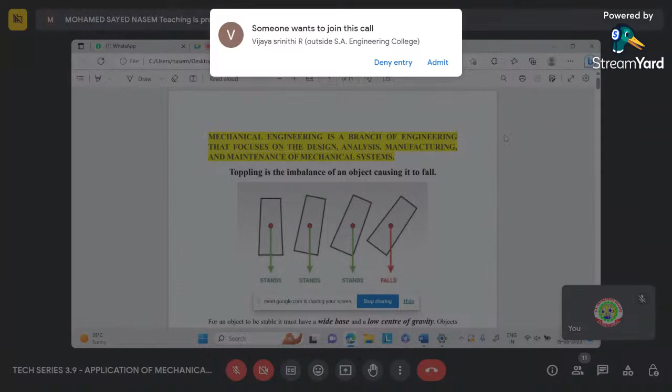Mechanical engineering is the branch of engineering which mainly deals with design, analysis, manufacturing, and maintenance also. Let me make it much simpler. If you want to make a steady table, the first criteria would be what size you need to make the table. What should be the height, the length, the width of the table? Okay, once that's clear, I'm going to make a table.

And then the analysis part comes. Now I'm making a table, so what material should I use? How can I reduce the cost? Mostly analysis deals with the strength of the product which we make and the cost of the product. Before making the product, you need to decide what material to use and how can I make it cheaper.

How could it be design friendly? How could it withstand much better load and get along with our design criteria such as the length, width, and height of the table? Then you start to manufacture. In manufacturing there are a lot of processes, and you need to choose a specific process which is cheaper and easy to make. There is no point in making a product which would cost you so much.

And the last thing that follows is maintenance. Once you release the product and it is running very good, everything wears and tears over time, so maintenance is quite important. This is broadly about engineering. I'm not going to talk heavily about engineering. My concept is about application of mechanical engineering in day-to-day life.

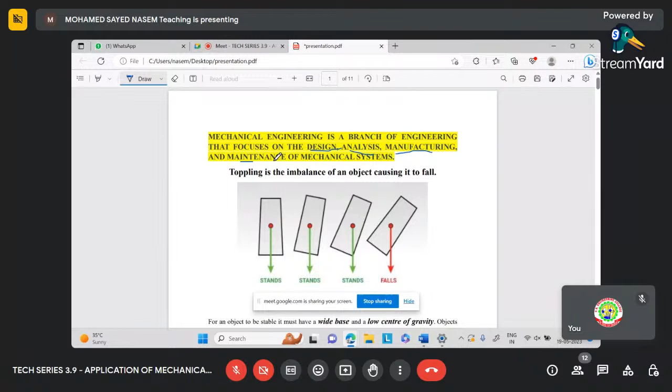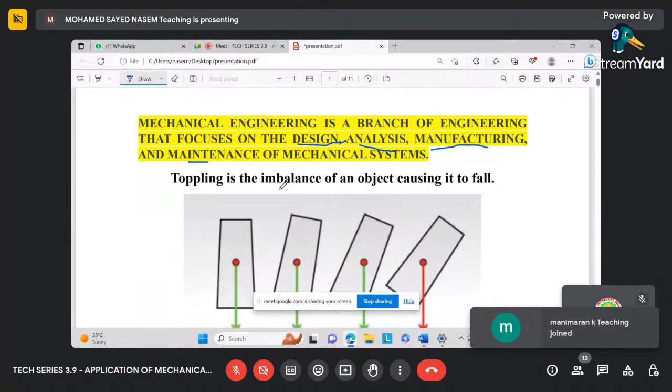So here we have something called toppling. What is toppling? Say you just push a glass of water. Will that water be toppled or not? Simple. In this diagram, consider this to be an inverted tumbler, and I have certain points. These points are called the center of gravity. Center of gravity is a point in an object where the whole mass tends to act.

In the first image, we can see where the center of gravity is located. If you want to find the center of gravity and my tumbler is a perfect rectangle in shape, I draw two diagonals, and my drawing is not that great. The intersection point will give you the center of gravity. The center of gravity changes due to the shape and the mass distribution of the item. So as of now, let's assume the center of gravity is at that point.

Okay, let's assume the center of gravity is at the point in red, and the property of center of gravity is that it directly points towards the Earth's center. So this center of gravity is directly pointing towards the Earth's center. If I apply some force at the top, what do you expect? The glass tumbler would tilt at this point.

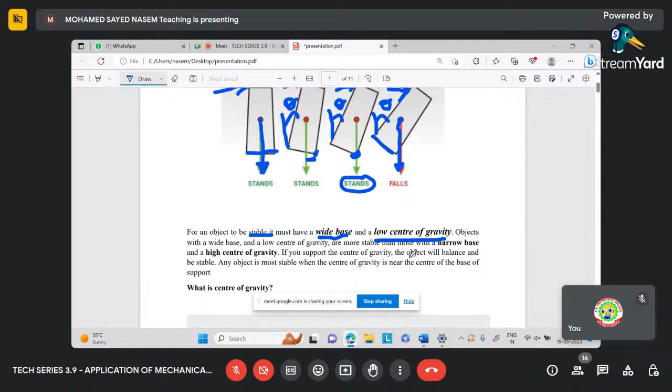So this will cause toppling. So for an object to topple, you have some conditions to satisfy. What are the conditions? For the object not to topple and be stable, there are some conditions: wide base and low center of gravity. So you can understand what wide base is.

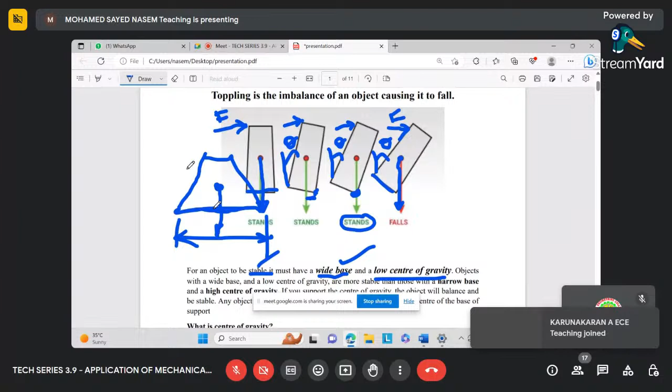If this leg was designed much bigger, for example, if this was like this, what happens? This is the base length. The base is much bigger. So this kind of design would be more stable. The center of gravity will be at some point here. It will be pointing down. In order to topple this, you need to push it to a huge angle. Only then will this object topple.

So the idea here is to understand when an object topples and when an object becomes more stable. In order to make a design stable, you need to have a wide base and low center of gravity. Okay, sir, how do you reduce the center of gravity from this point to a lower point? People might have a doubt. So I told you, to find out the center of gravity of a uniform object, you just draw two

diagonals. Consider this to be a cylindrical or a cuboidal object. So this is the center of gravity, and this will always point towards the Earth's center. Now my objective is to bring this point from here to the bottom. What I can do is redistribute the weight. What do you mean by redistribute the weight? The top portion, I could bring it to the bottom. So I just cut the top portion and place it here so that the mass doesn't change.

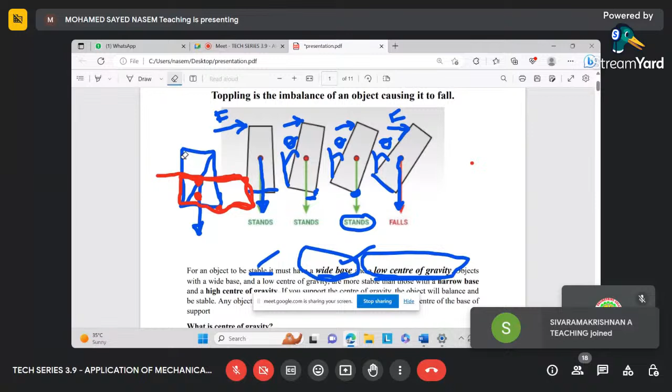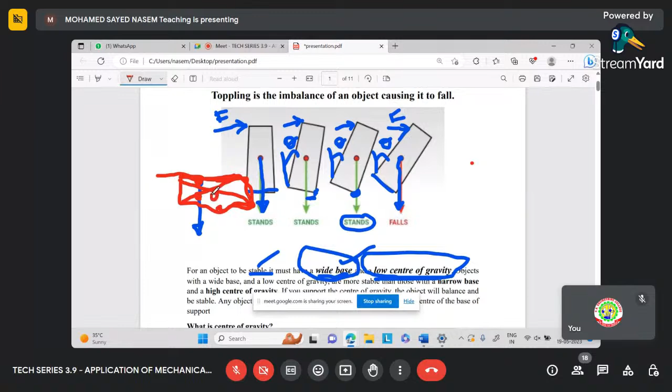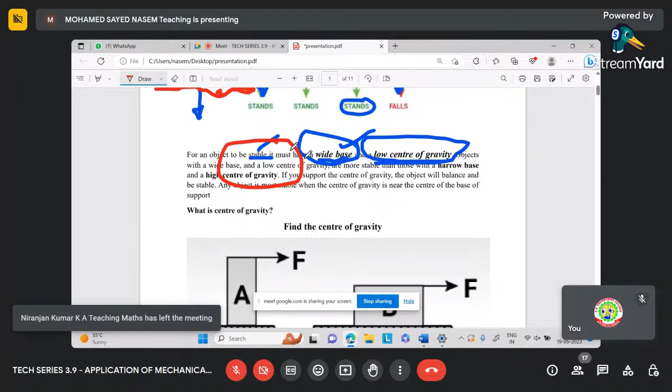Now the new object is red in color. I have just removed the top part, and now my object is here. The mass is same. But now the center of gravity will come more towards the base. So these two key points are very important. In order to maintain a stable design, you should widen the base and lower the center of gravity. That means you need to bring the weight to the bottom.

Okay, so we have learned what center of gravity is. So here I have a small quiz-like thing. You won't be able to answer, unfortunately, because I have the control. So I will help it out.

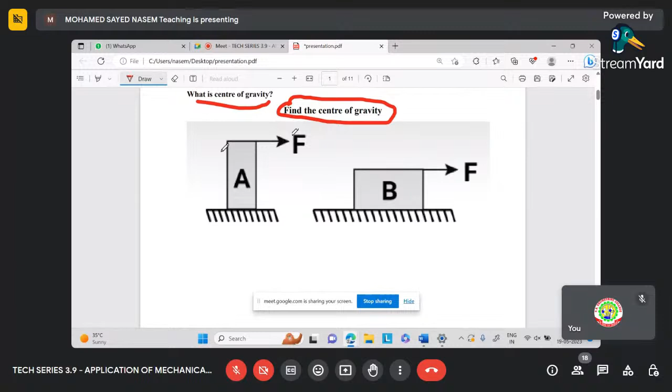So find the center of gravity. I have two objects, object A and object B, and my criteria is to find the center of gravity. This object is quite simple. Okay, it is a rectangle. It looks like a rectangle. This is also a rectangle, but the base of the rectangle is much wider.

Okay, in order to find the center of gravity, what you do is draw two diagonals. This is not the actual way of finding the center of gravity. You need to hang it at different points and allow the gravity to pull it down, that line to be intersected, but because the object is simple in shape, for our consideration let's make it simple. So here is our center of gravity point, right? So my center of gravity point is here, the intersection.

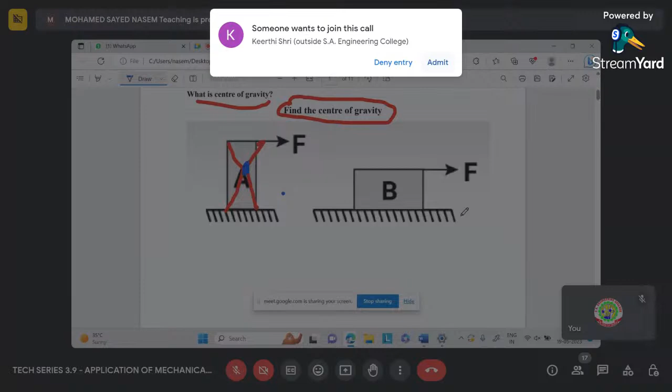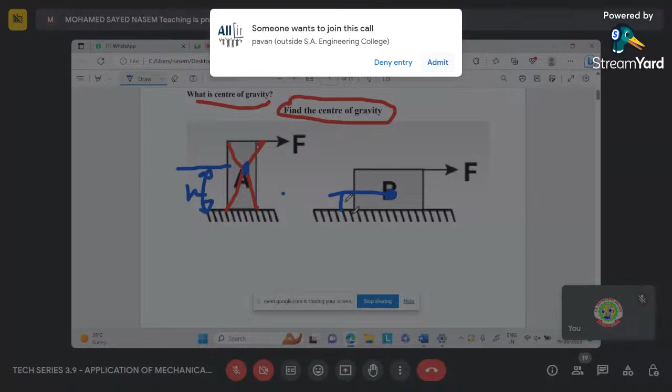So here, without drawing lines, I'm just marking a point. It is just an approximation. You would be able to figure out the center of gravity by the geometry of the object. So the center of gravity here is at a much higher distance than the center of gravity of object B. So the center of gravity of object B is lower from the ground, whereas the center of gravity of object A is higher from the ground.

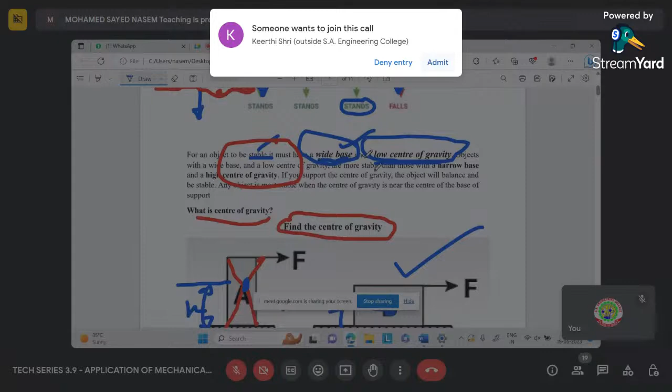So from this, you would be able to identify which is a more stable design. The stable design would be B. Why? Because of two reasons, two conditions. In order to have a stable design, your base should be wide and the center of gravity lower, right? Compare the base of A and compare the base of B. The base of B is wider when compared to A.

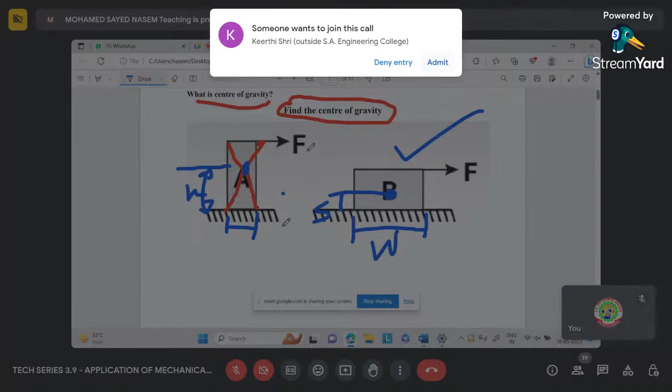And the height of the center of gravity of B is much smaller than A. So if you try to apply a force F on both objects and try to topple it, A will be easily toppled. B will also be toppled when the center of gravity line passes the base.

For example, let me draw, this is B. So if I tilt it a smaller distance, the center of gravity is here, and the center of gravity lies within the base. If I tilt it more, what happens? The center of gravity has gone beyond the base. This was the base, right? So this leads to an unbalanced condition.

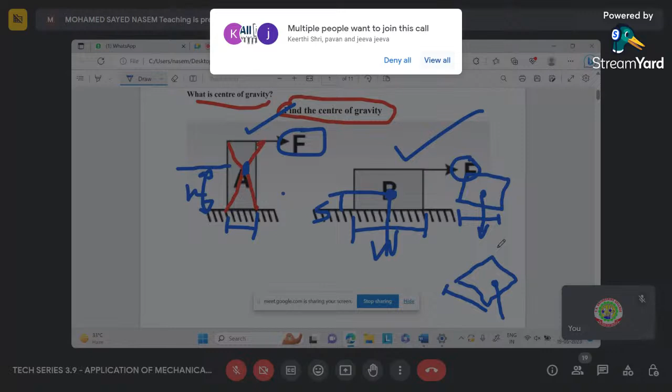So again, these are the two key points in order to see an object and predict whether you have a stable design or an unstable design. What should be the criteria? You should have a wide base and lower the center of gravity by some means.

Okay, so now let's take it to a practical example. Here I have a car. It looks like a decent sedan car. Okay, so I have three examples of the car. Now let me consider the first example, these three cars. What is happening is the car is going on an inclined plane. Okay, the road is slightly tilted. So what happens? The car will also get tilted.

So now let's check whether the car is safe to drive and how to choose a car. So consider that you're going with your parents to choose a new car. So what are the criteria? We always look at the color, the interior, the features, the specifications. But the most important thing is safety. We also look at safety in terms of whether airbags are available, the seatbelt locking systems.

But consider that we are driving on a slant or a slope. These things have to be considered: what kind of car you need to buy. Okay, so let's consider this condition. So in this car, the center of gravity is located at the center approximately. So this base, the tires, right? Both the tires are the base.

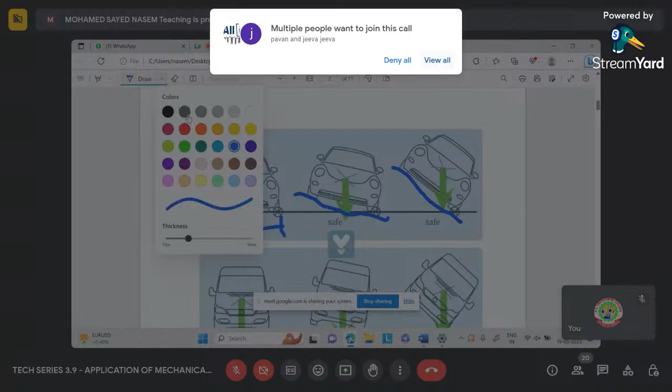So center of gravity, let me change the color. The center of gravity is within the base. So the car will not topple. Topple is just going around this way. Okay, now the car is going on an inclined plane. The center of gravity always points straight towards the ground, the earth's center. Okay, still my center of gravity line is within the base of my tires. So this is also safe.

When it is inclined more, what is happening? You can see, right? The inclination gets more and more. So when the inclination gets much more, what happens? Still, my base is here. These two points are my base points. So this center of gravity line is within the base. So still, this car is safe. This car is safe to drive.

So let's consider a different car. What has happened to this car is, this car is shorter. The height of the car is low. Let me represent this height as H1.

And let me represent this car, which has a height H2. Now we could compare the height of H1 and H2, and obviously H2 is bigger, right? So consider a car like Innova, which is much taller. Nowadays, big cars are more preferred, and we tend to buy big cars, not understanding the risk of buying those kind of cars, right? So what happened from here to here?

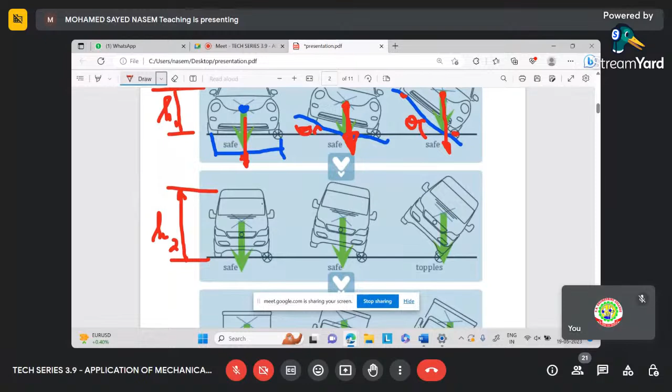The center of gravity point was here at a height. Now the center of gravity point has moved up. Okay, from here to here, the center of gravity moved up. I told you, in order to have a stable design, your base should be broader and the center of gravity point should be much lower. So if you have that condition criteria, you would be able to have a stable design.

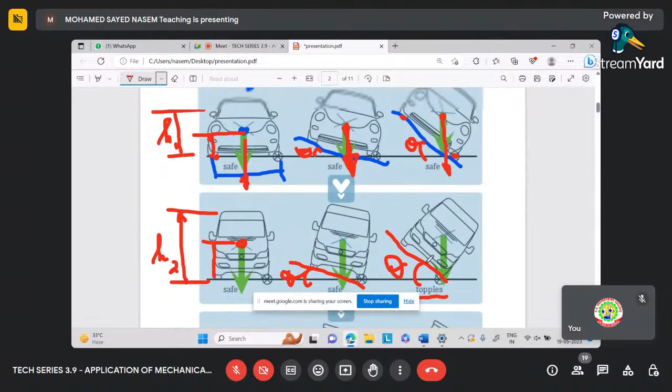So now there is an inclination here. There is also same inclination. These thetas are same. Both inclination angles are same. So here, but what happens? The car tends to topple. I'm not considering what speed you are driving a car on that plane. It is just purely based upon the design and stability, whether the car would be stable or not.

Why does this topple? The center of gravity point is here, and the center of gravity line, when you extend it towards the earth center, what happens? It is away from the base. When this happens, it is going to topple. Okay, so let's consider bigger vehicles.

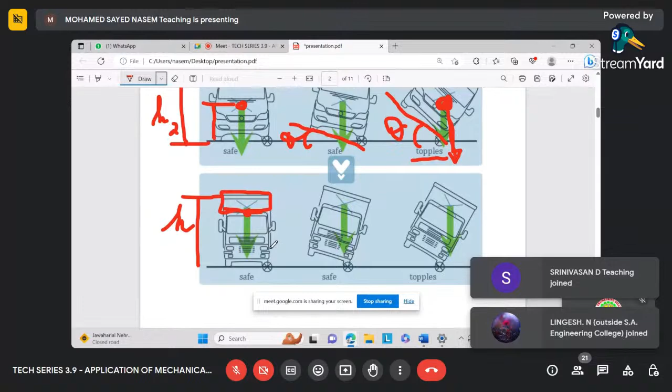Let's consider a lorry. Generally the height of a lorry is more, and because it has a higher height, people tend to load weight at the top portion. In the lorry's bottom portion, you have the chassis, but if the lorry is loaded at the top, what is going to happen? The center of gravity is going to move up. If I load my lorry at the bottom, the center of gravity will come down. People tend to make these mistakes.

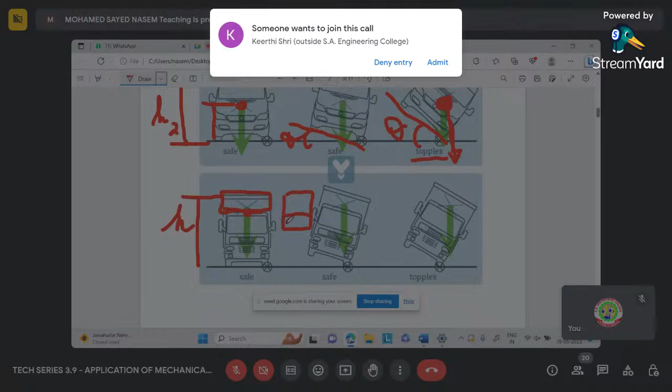Lorry drivers, if they have a space to fill, let's see, this is a container of the lorry, space to be filled. If they keep lighter weight at the bottom and heavier weight at the top, the center of gravity moves up. So they could make a small change in loading their trucks. They could keep the heavier portion down and lighter portion up in order to bring the center of gravity to a much lower position, right?

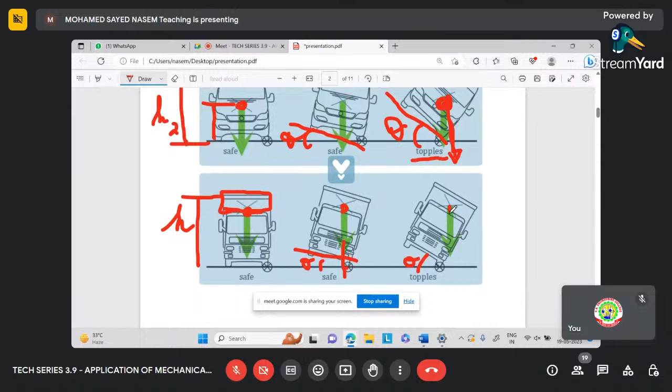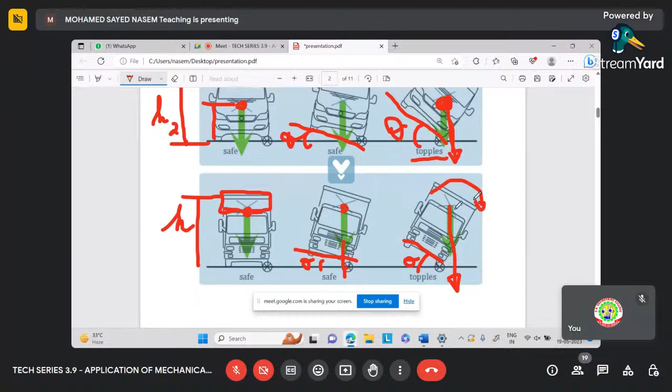So now let's consider this lorry. The center of gravity is at the top. So for a smaller angle itself, what is happening? Almost the center of gravity line is touching the base. And when it is more tilted, the center of gravity line is away from the base. It is not stable. So this lorry would topple for sure. So from this, you could find a pattern, right?

So if you ask me which type of car is better to buy: a car which has a center of gravity much lower to the ground. Consider race cars, Formula One cars. Do you know that people sit almost at floor level? So they reduce the height of the car. Let me consider this Formula One car. I'm not good in design drawing. So the Formula One car's center would be much lower, so that it becomes much more difficult to topple.

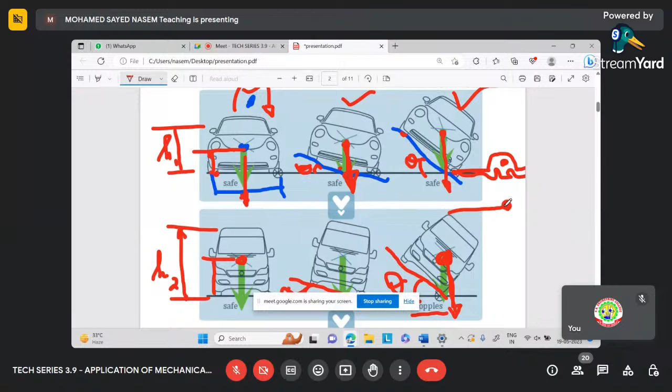And the width of the car would be also big, right? So let me consider these are the tires of the Formula One car, and the driver would be sitting almost close, right? So you have a wider base, and the center of gravity point is very low. So this car can be tilted to a very, very great angle, and still it will not topple because the center of gravity line is within the base.

So next time when you go to shop for cars with your parents, you need to look for two factors. Check whether the width of the car is a considerably good distance, because nowadays we look for compact cars and city cars. But having a compact, smaller width could be dangerous. You want to have a good wider width. More the width, the better it is.

And you want the car to be short. Some people think that if the car is tall enough, we have good sufficient legroom. That is true, but if we consider toppling, that is not good.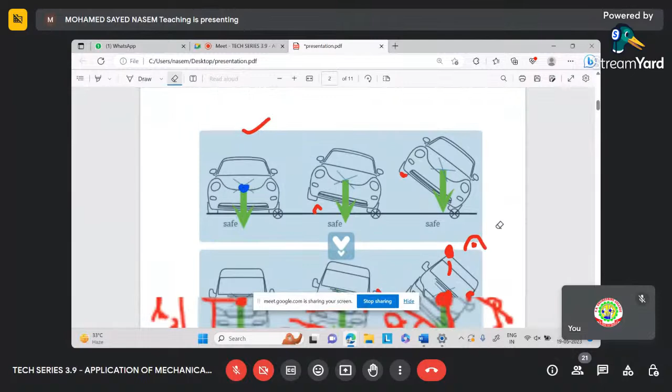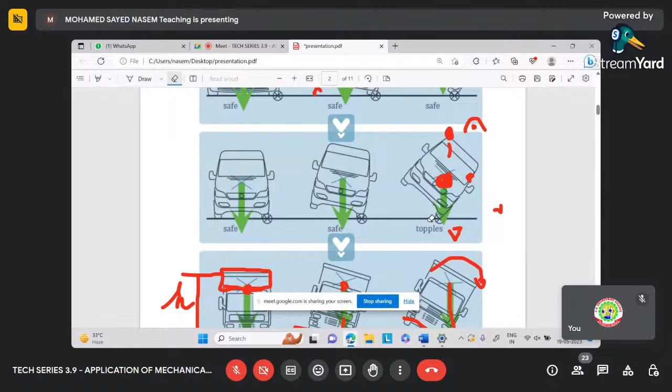Okay, so next time when you go to buy a car or make a decision, because it is a huge purchase and life comes into play when buying a car, and safety comes in, while driving also you need to really understand at what inclination you can drive the car. Some people think that their car can be tilted to a much greater angle, and they drive it on a slope, and that would cause them to topple, right?

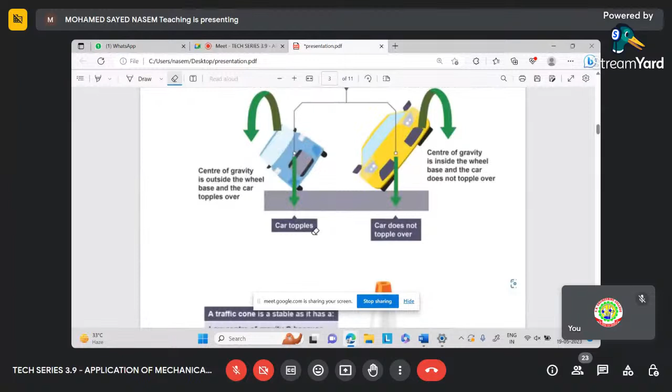So this is a comparison between two cars. This is a narrow car, a small car. Okay, this is a broader car. These are being inclined to the same angle, theta. Okay, the inclination is the same. But what is the difference here?

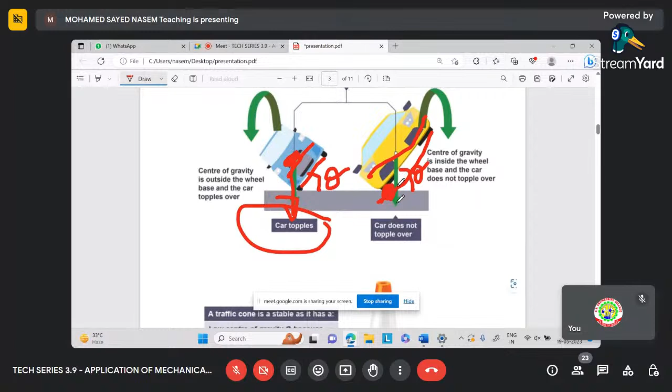The center of gravity point is here, and the center of gravity line has gone out of the base. So it is not stable, and this tends to topple. The car will topple. Here, because of the wider base, we still have some room here, right? The center of gravity line has not crossed the base. So this car is more stable and does not topple.

And this is also another example. Look into the design factor, right? Why should it be designed like this? This is designed in this way because more mass is concentrated at the bottom and less mass at the top. So technically the center of gravity point comes at the bottom, and I told you, wider base.

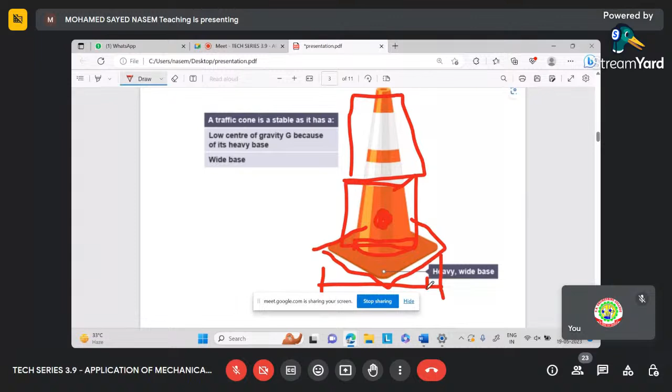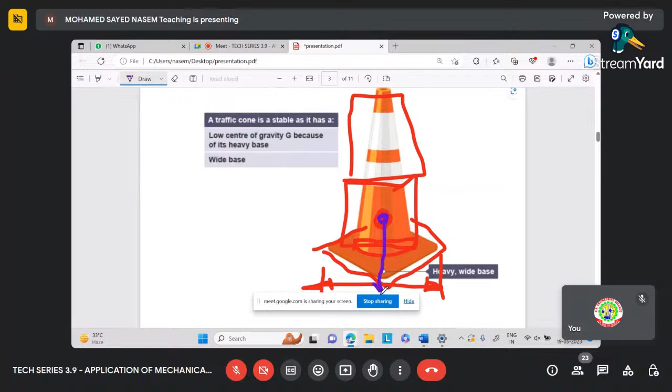So look, they could have completed it with a cone, but the reason they have this rectangular or square base is they wanted to increase the width. They could have a circular base, but they prefer this design in order to increase the width by a large margin, so that the center of gravity line is within the base, and the center of gravity point is also close to the ground. This is where the center of gravity is, close to the ground.

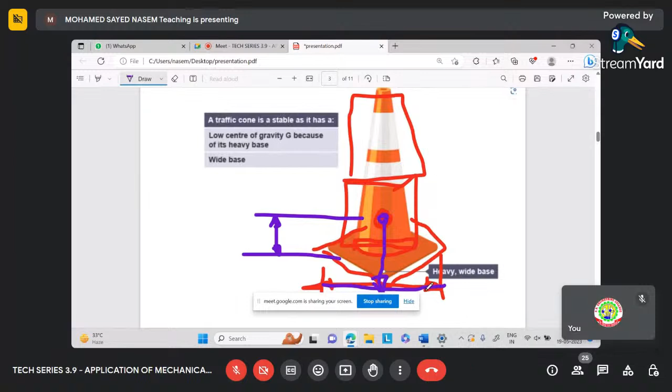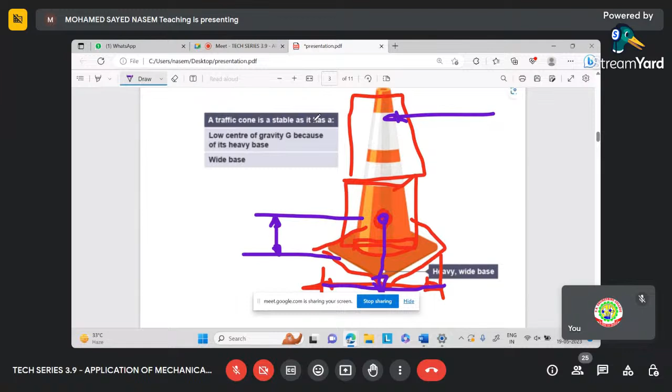So I think you would appreciate why we have a design like this, so that if someone accidentally knocks this cone with their hand, it won't topple. It will incline and come back to its original position because of its stability.

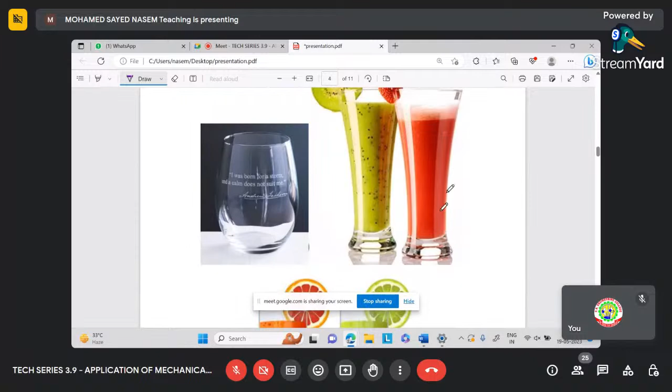Okay, so now having understood all those concepts, let's consider another scenario. Now you are planning to have a fruit juice shop, and you want to purchase some tumblers. By looking into the design, what kind of tumblers would you purchase? Number one, you would purchase fancy tumblers, obviously, for attracting customers, and you will try to buy tumblers which hold less fruit juice but appear as if the quantity is more.

That's another criterion. But consider the safety of the tumbler: because you will be making juices and often using these tumblers, you could accidentally topple one by applying a force, right? This happens at our house also. We have a jug of water, some family member accidentally knocks it, and the jug tends to topple. So we need to consider what kind of glass to buy. Consider these two scenarios.

In order to have a stable design, your base should be wider, and the center of gravity should be low. Base should be wider and the center of gravity should be low. So consider this design. Let me change the color because it is blue. Let me make it yellow.

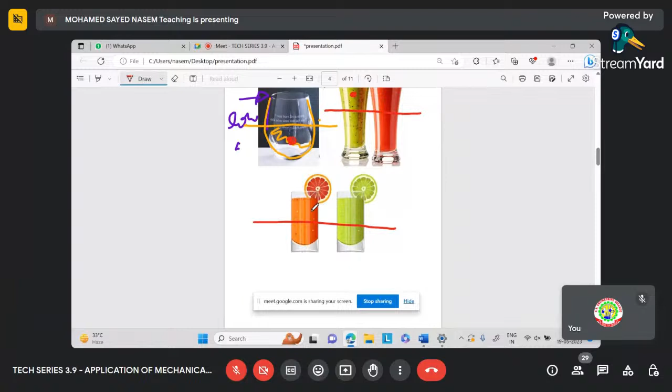Now let's see here. Again, draw a line bisecting the glasses. Here the center of gravity point is just at the center. That's number one, right? Number two, let's consider the base. This is the width of the base.

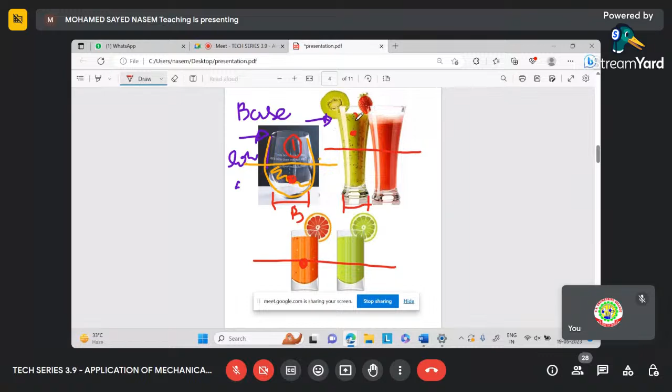This is my base, right? Here, how is it designed? The base is much narrower when compared to the first glass, right? The base is first narrower. Let me have this as first glass condition, second glass design, third glass design. Okay, in the second glass design, I have a narrow base. For a third glass design, I have a broad base.

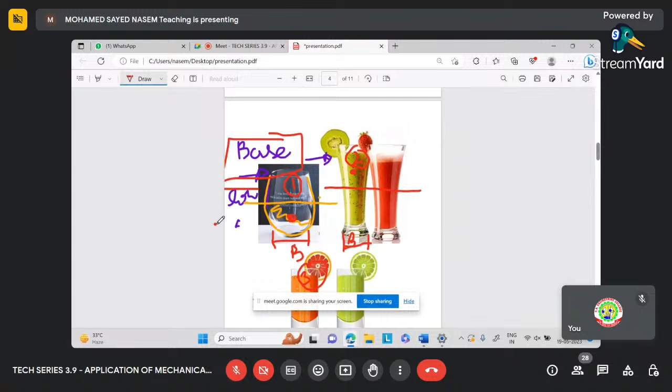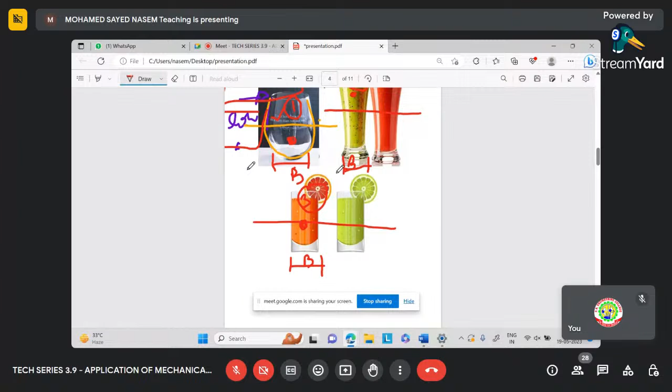So now you can compare all the three glasses. I told you for a stable design, you should have a bigger base and lower center of gravity. Let's compare 1 and 2. It's been messy, now I'm going to erase it a little bit. So let's compare 1 and 2 here. Which has a bigger base, 1 or 2? Obviously 1 has a bigger base. Which has a lower center of gravity, 1 or 2? Obviously 1, whose center of gravity is at a much lower distance from the ground.

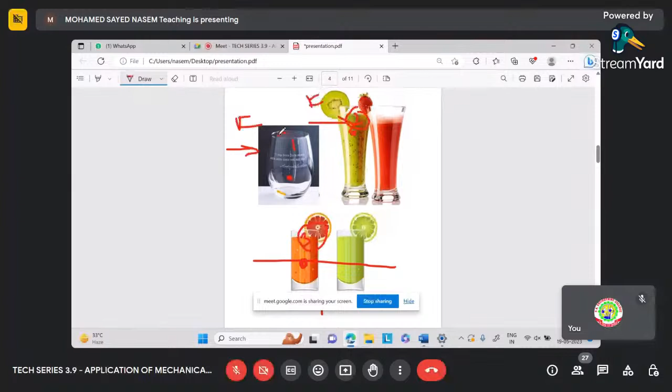Okay, so comparing these two glasses, glass 2 might look fancier, and you might have this kind of glass in a shop. But if you're buying it for a house, you would definitely buy glass 1, because accidentally, if you apply a force, let me erase, a lot of things going on. Accidentally, if you tend to apply force, what happens? Accidentally, I apply a force. Glass 1 tends to be more stable. It won't topple and it won't break. Whereas glass 2 will break for sure.

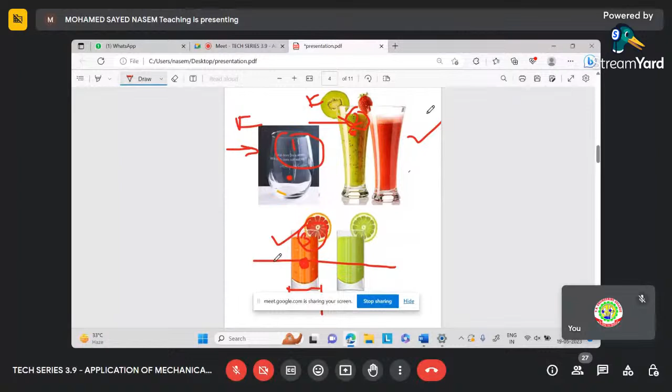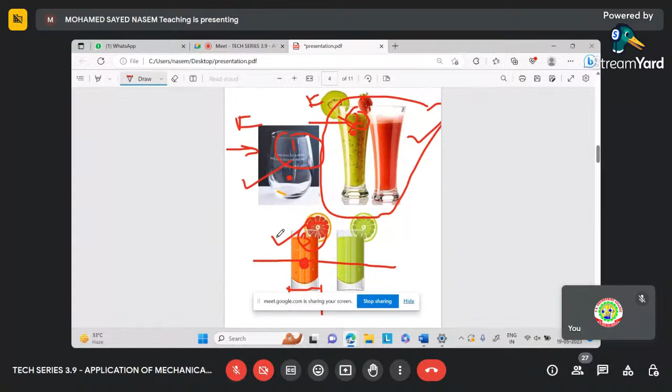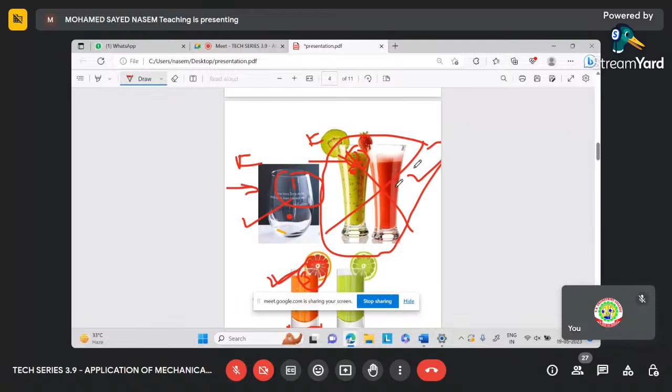How about glass 3? When comparing glass 2 and glass 3, glass 3 has a much wider base and the center is at the center. Okay, so glass 3 is also a better design when compared to glass 2, but unfortunately in most of the juice shops they prefer glass 2, which is prone to breaking, but it is good from an aesthetic point of view because it consumes less juice and it looks good and nice. But if you decide to buy it for your house, go with glass 1, or you can go with the tumbler, glass 3, which is a much better design. I would never prefer this design because it is prone to breakage due to tumbling.

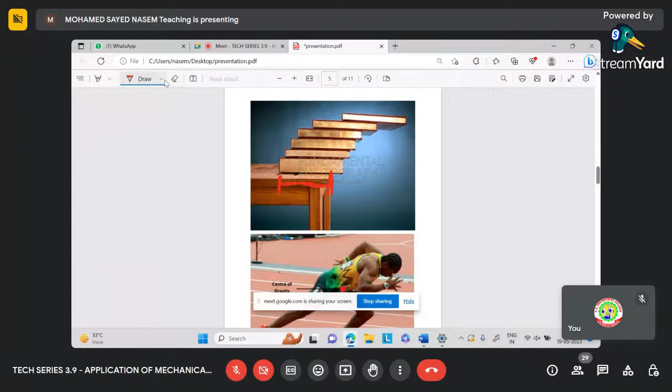Now consider, where is my base support? From here to here, there is no support after the edge of the table, so the base support is here and here. And if this condition is stable, what should the center of gravity line be passing through? It should be passing through this line, passing through the base, anywhere in the base. Our common sense says that because the weight is here, the center of gravity, the center of mass, should be somewhere here. And I'm not bothered because this is a stable design.

So you can also trick your friends by making this setup. How do you make this setup? I told you, to be stable, the center of mass should be at a lower position and the base should be wide. So in order to make this kind of arrangement, I'll change my color. I would use a bigger, longer and heavier book at the bottom. The next book should be heavier, but with a little bit of offset from the first book, hanging a little bit, and the next book which you keep above should be lighter, a little bit offset.

So what I'm trying to do is make my center of gravity point lie within the base. That is the concept. If you are able to achieve it, you would be able to get this design of arch. So next time when you see an arch in building design or anywhere, always think about why it is stable, what could be the conditions to make it stable, and how you could improve the design, right?

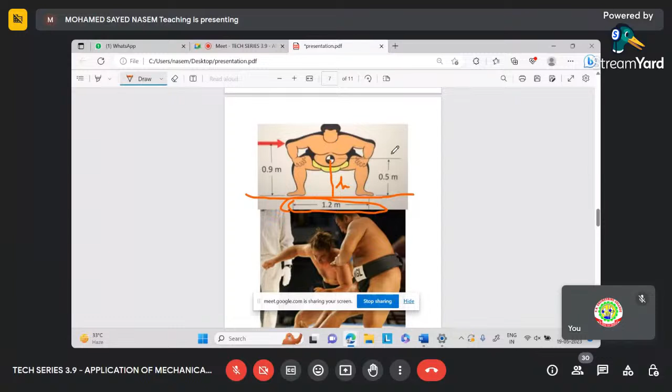If this person had been standing, sorry for my bad drawing, I guess you understand what I'm trying to say. If he was standing, the center of gravity point would be at a much higher position, right? So I told you, in order to be stable, the center of gravity has to be lower and the base should be wider. That is why sumo wrestlers keep their feet wide and crouch down.

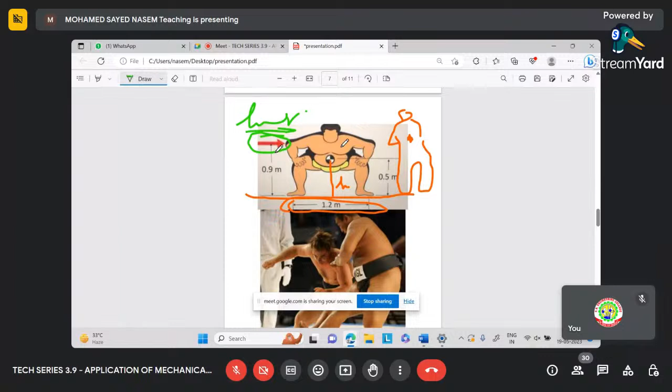So now, if we consider force also, if we apply a force in this direction, the red arrow, he is much more stable because he needs to be tilted by a large angle. You have to apply a huge force in order to topple him. But if his legs were much narrower, if his feet were somewhere here in this green box, it is easy to topple, right? You get this idea. So you can figure out what makes a design much more stable.

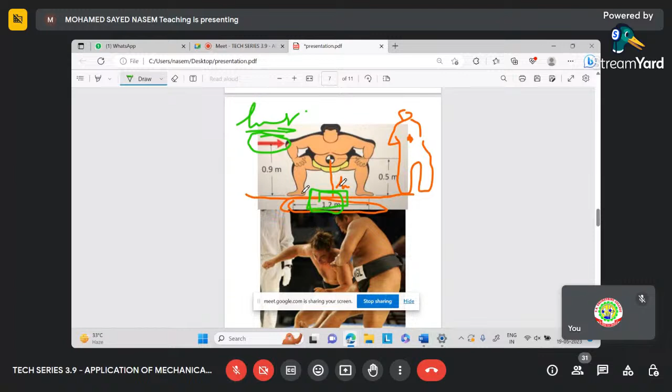Next, here there are two sumo wrestlers trying to compete. The whole point of sumo wrestling is to topple the other person. We have this wrestler, let me name this wrestler 1 and this wrestler 2. By looking at this screenshot, now you should be able to predict which wrestler will fall down. Okay, so let me help you find it by looking at it.

Let's see. For both wrestlers, one foot is up. So this wrestler's base is here. And this wrestler's base is here. And you see, wrestler 2 has not bent so much, whereas wrestler 1 has bent a lot.

Okay, so his center of gravity has moved somewhere here. This person has not bent. This center of gravity would be here. This would be at a lower position because he is crouching. The person 1 is crouching, so his center of gravity would be lower. The person 2 is standing. His center of gravity would be at a higher point. So I told you, for a stable design, lower the center of gravity is good.

If you consider that, this person is good. This person is not that good. But the wrestler 2, he has not bent that much and his feet is well stable. So if I draw a line, it is well within his base, right? This is his feet base. Whereas his feet is here, but the center of gravity point is away. So the center of gravity point is away and the feet is somewhere else.

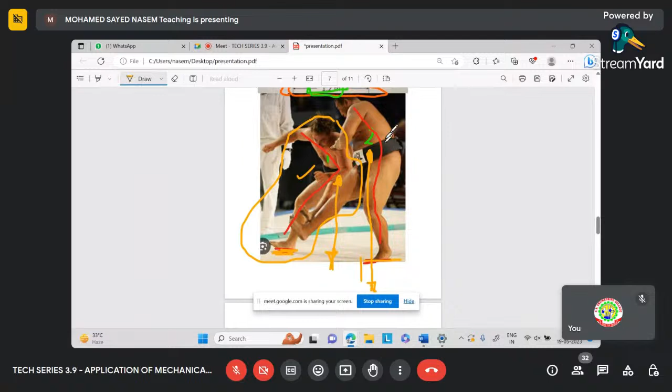Okay. Now this is the third scenario. So what is happening? Look at this wrestler. Wider base, and he's crouching. So his center of gravity is somewhere here. Let's draw a center of gravity line which points toward the Earth's center. So this center of gravity line is much within the base.

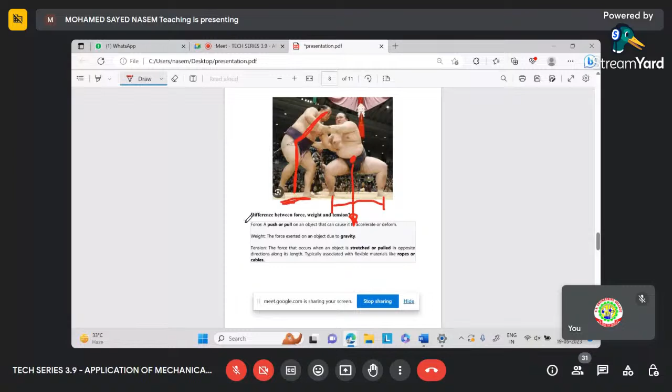Whereas what has happened, look, I'm drawing a stick diagram. He is bent, right? He is bent and his feet is here. So what is going to happen is his center of gravity, his center of mass, would be somewhere here. If I draw a line, it is away from his feet. So the sumo wrestler, who is very stable, would be easily able to topple the other wrestler.

Okay, this is not only in sumo wrestling. This happens in almost all kinds of sports. Even in cricket, now there is an IPL season going on. You could see catches being taken, and some of the catches are terrifically taken. They are able to take those catches if they are very stable. Even when they make a dive or attempt to catch in a diving position, they need to be stable.

And you can also find some silly catches which come directly to their hands being dropped, because they would have kept their feet in the wrong position. The body, they would have bent to one side, which would cause them to topple. Okay, so as of now, we have learned what makes a design stable. What are the criteria to make a design stable? Two criteria: wider base, lower center of mass. And the center of gravity line should always pass within the base.

This is that concept. Now let's move to a different concept. As we are in the mechanical series, let's discuss the difference between force, weight, and... let me erase a little bit. Okay, let's find what's the difference. Let me change my pen. I have an issue. Okay, I'm in my pen mode. I'll just check eraser, pen.

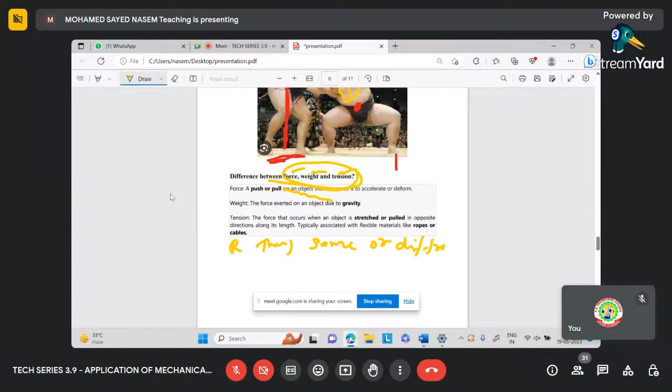Okay, so let me give you an example. My name is Nasem. My family members and close friends call me Nasem. My colleagues call me sir. My wife calls me Bubbly. It's all different names. My wife calls me Bubbly, my colleagues call me sir, my close friends and family relatives call me Nasem.

I'm asking you: Nasem, sir, and Bubbly, do they represent different persons or do they represent me? This is me. Okay, I'm happy. I'm not yellow in color. I'm happy. These all 3 names are the same, right? You could call this in different ways. Let me erase. Same way, these three terms are same.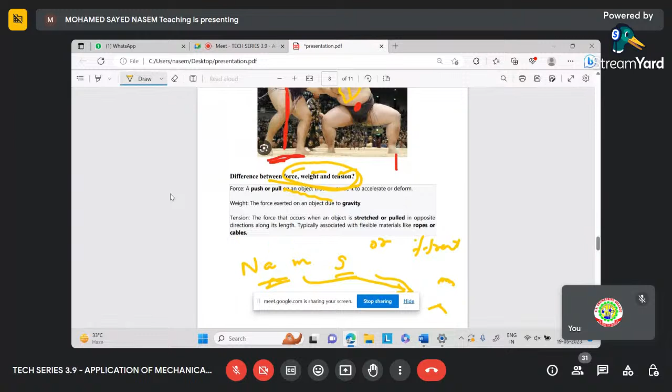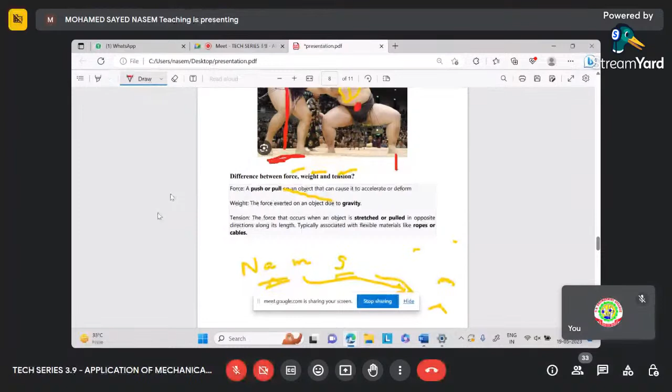Okay, what are the three terms? Let me change the color. These three terms: force, weight, and tension. These three terms might have different names, but they mean the same. Because you know that the unit of all three terms, you would have studied in 12th, is newtons. All three are the same. So what is the basic difference between these three names?

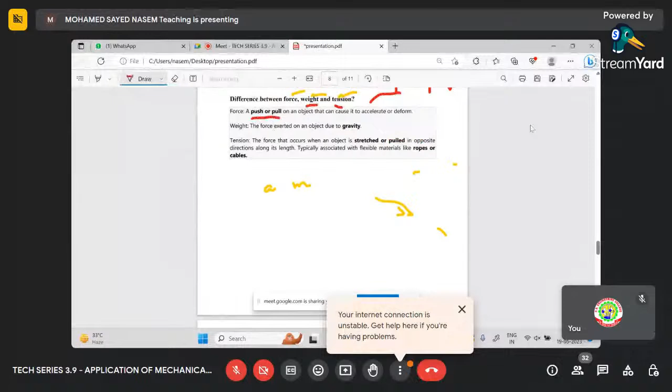Okay, a push or a pull is called a force. Here I have written, right? So let me erase, so shabby. So a push or a pull is called a force. Weight is also a force that is caused due to gravity. Okay, so let me consider a box. If I am pushing, I will call it a force. I am pushing or pulling.

Push or pull. Okay, I am pushing or pulling. This is called a force. This is a force. So next, let me consider. This object is always attracted, pulled by whom? There is an imaginary person who's pulling this object straight towards the ground. Who is that person? That person is gravity. So force due to gravity is called weight.

Okay, push or a pull is called a force. And if that force occurs due to gravity, who's pulling? This is me who's pushing and pulling. If the gravity pulls, it is called what? It is called weight.

And what is tension? Tension is also the same thing. You have a pole, you attach a string to that pole, and if you're tending to pull it with a force, what happens? There is a tension created in the string or the rope. So the force in the rope is called tension, right?

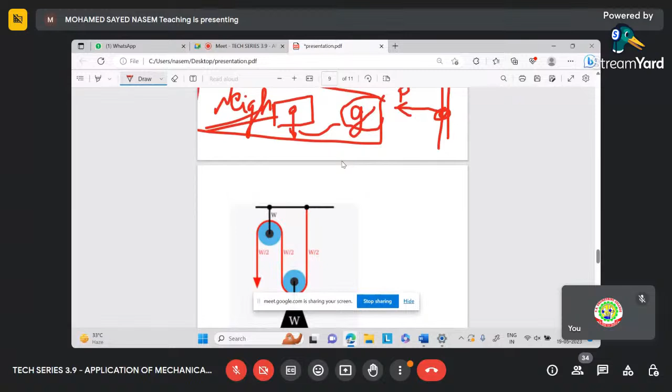So now we understand force, weight, and tension. All three are the same. Force, we name it when an external body is being pushed or pulled. Weight is a force due to gravity, and tension is a force in strings. You need to understand that. Okay, now let's practically use this concept in order to lift the weight. I just want to explain it very short and simple.

So here my objective is to lift a weight. I have a weight, mass W. If I'm lifting it, I have to bend. This is my head. With my hands, I have to lift it, right? So much stress goes on my spine. I might injure myself. So here I have to pull it up.

But with a pulley system, I have a pulley and I have a string attached over the pulley. On one end, the weight is connected. Here, I can pull it easily. Here I have to pull it up, which will put so much stress on my back. Here I can use my weight in order to pull it down so it does not hurt my back. By just using a pulley, my work has been simplified.

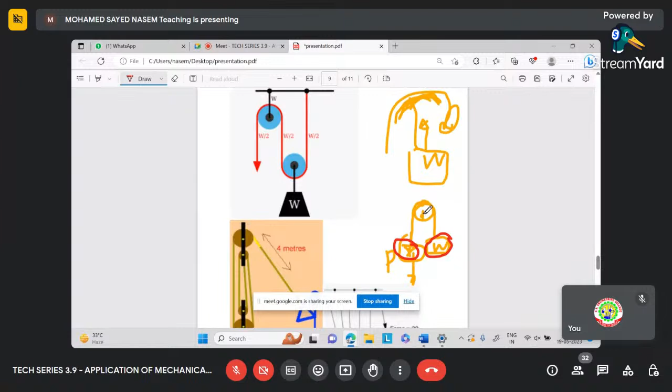So here is a pulley system. More than one pulley, you call it a system, right? So why use a pulley system? You use a pulley system in order to lift it much easier. Let me change the color. Whatever the weight here, I have to put the same amount of effort on the other end if I use a single pulley. But the advantage of this single pulley is I'm changing the direction of force.

But here I have a pulley system. There is the same amount of force because this is a single rope. The same amount of force is always present in this rope. So if I cut this rope here, there is a tension. I told you there is always a tension. Force in strings is called tension. So it is as if two persons are pulling. The same tension is here. The same tension is at the other end also.

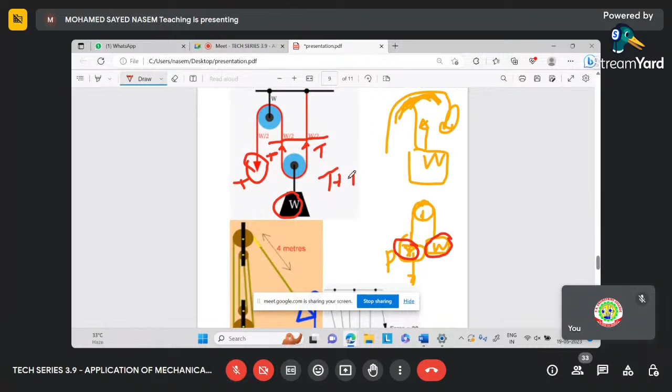I'm pulling at this end. If I cut it, you can see that this has to be pulled. In order for this to be lifted, the same amount of weight should be balanced. So there is a tension T here and a tension T here. A little bit of mathematics: how can I write an equation? Tension plus tension will be equal to the weight I'm pulling. So 2T = W. So what is the tension in my string? It is W/2.

Let's do the math. If I need to pull a weight of 100 kg, what force should I apply here? The force I have applied is just the tension. How much is the tension here? If W was 100, W/2 would be 50. So now there is an advantage. In order to lift a weight of 100 kg, it is enough for me to apply a pulling force of 50 kg. So this makes an advantage.

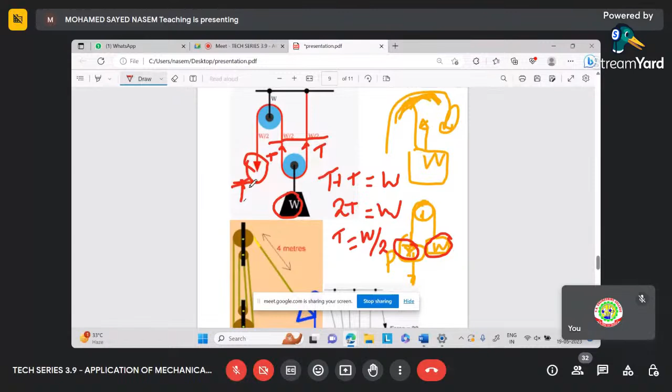Here, let's see what is happening. Will a person be able to lift a 200 kg load? No, right? With the help of pulleys, this could be achieved. So I'm making a construction. What happens? Each string has a tension. Tension is developed here, here, and here.

Tension is developed here. The same tension, I need to pull it. So how many tensions? 1, 2, 3, 4. So 4 times. 4T will be equal to, in order to pull it up, this has to be balanced. 4 tension upward and the weight is always downwards. It's pulling in the other direction.

Okay, so 4T is equal to 200. So what will my T be? 200 divided by 4. See, isn't it amazing? So 50 kgs. In order to lift a weight of 200 kg block, I need to apply a force of 50 kg, which is much easier.

Now look, how does this string system become? Okay, so here, the weight is here. So I have to apply a tension. So how many strings attached? 1, 2, this is 3, this is 4, and this is 5. So here my equation becomes much simpler. 5 times tension should be equal to 100 kgs.

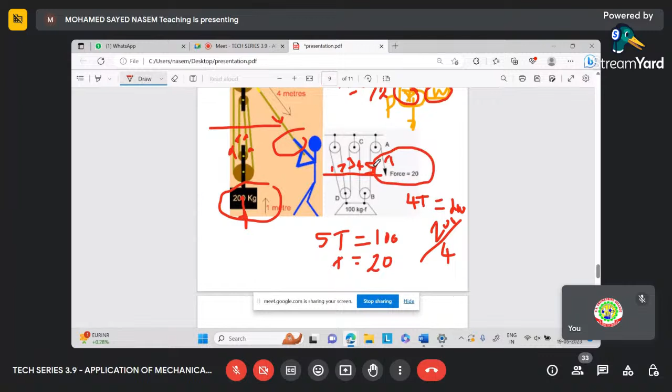So what is my tension here? It will be about 20 kgs. So it is enough for me to put a force of 20 kgs and pull it. So here I am having a great advantage, right? So look at these systems. For this I need to apply 100 kgs. Here I need to apply 50 kgs force to pull this one.

Here 3 times tension is equal to 3T. Let me write this equation. 3T is equal to 100. Here 1, 2, 3, 4, 4T is equal to 100. Here 5T is equal to 100. The more complex the system becomes, the easier it is.

Okay, so next time when you go to the gym, I know that most of you would be trying to go to the gym during your free time, I want you to look into the gym. You have a lot of pulley systems and how those systems are arranged. Are you actually lifting the weight which you put on the cable rope, or are you actually lifting less weight? Here the person is lifting actual weight.

So whatever weight the person is applying here, he has to pull it. So if you have more pulleys, you could reduce the effort he is applying, right? So next time when you go to the gym, I want you to look at it in this way.

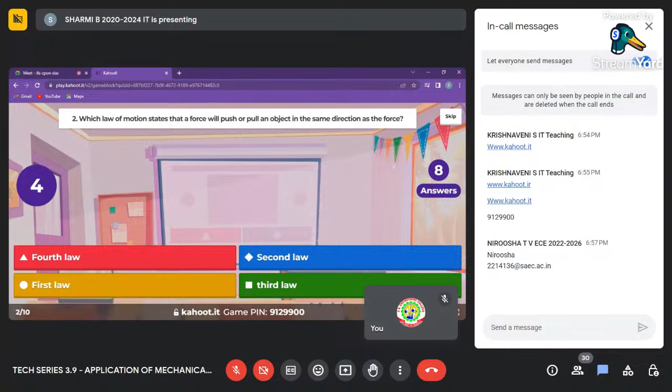Now Balaji is in the first position with a score of 857. Let me move to the next one. And your question 2 is, which law of motion states that a force will push or pull an object in the same direction as the force? Your options are fourth law, second law, first law, and third law. I repeat the question. Which law of motion states that a force will push or pull an object in the same direction as the force? Time is running out. 8 members have answered. Okay. 4 members answered correctly.

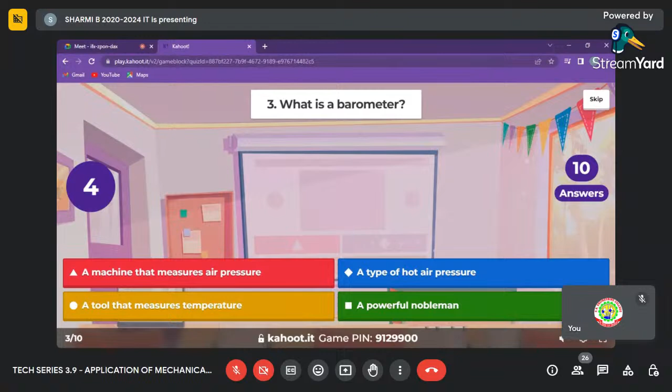And again, Balaji is in the first position with a score of 857. Let me move to the next one. And your third question is, what is a barometer? A machine that measures air pressure, a type of hot air pressure, a tool that measures temperature, a powerful nobleman. 30 seconds are left. 8 members have answered. I repeat the question. What is a barometer? And 11 members have answered. Okay. 7 members answered correctly. Now again, Balaji is in the first position with a score of 1758.

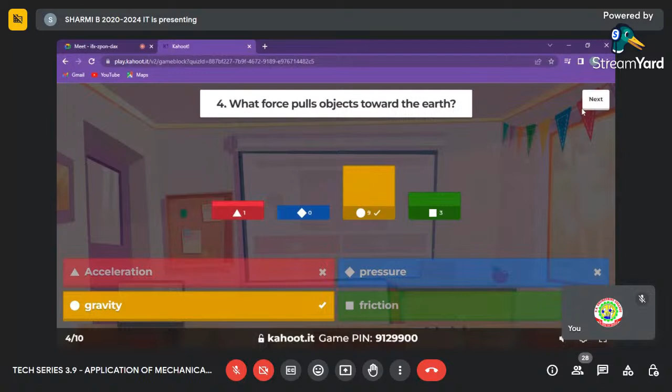We move to the next one. What force pulls objects towards the earth? Your options are acceleration, pressure, gravity, and friction. This is a basic question, guys. And time is running out. Only 12 seconds are left. 9 members have answered. Okay. 9 members answered correctly. Let me move to the scoreboard. Again, Balaji is in the first position with a score of 2587.

We move to the next one. Which scientist first figured out how gravity works? Albert Einstein, Archimedes, Isaac Newton, and Carl Linnaeus. I repeat the question. Which scientist first figured out how gravity works? 10 members have answered and time is running out. Okay. 8 members answered correctly. Again, Balaji is in the first position with a score of 3403.

Okay. Which object in our solar system has the most gravity? The planet Jupiter, the sun, the earth, and the moon. I repeat the question. Which object in our solar system has the most gravity? The options are the planet Jupiter, the sun, the earth, and the moon. Only 6 seconds are left. Okay. 3 members answered correctly. Again, Balaji is in the first position with a score of 4231. Good work, Balaji.

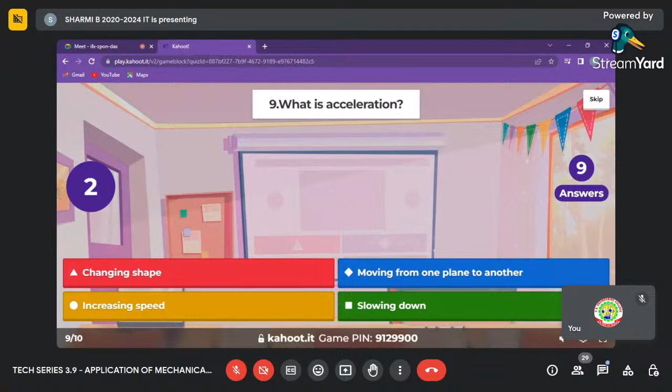What is acceleration? And your options are changing shape, moving from one plane to another, increasing speed, and slowing down. 4 members have answered and your time is running out. Only 30 seconds are left. Come on, guys. Only 7 seconds and 9 members have answered. Okay. 9 members answered correctly. We move to the scoreboard. Now Kicker is in the first position with a score of 5,360. We move to the last question of our quiz.

Okay. Where is air pressure highest? In an aeroplane, at the bottom of the sea, high in the atmosphere, in a house. I repeat the question. Where is air pressure highest? The options are in an airplane, at the bottom of the sea, high in the atmosphere, in a house. 7 members have answered and you have only 2 seconds. Okay. 8 members answered correctly.

Now we move to the podium. And the third position goes to Kicker. And the second position goes to Vidya. And the first position goes to Harini with a score of 6,268.